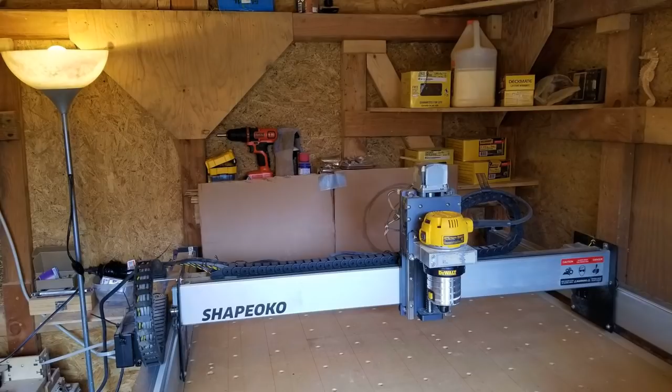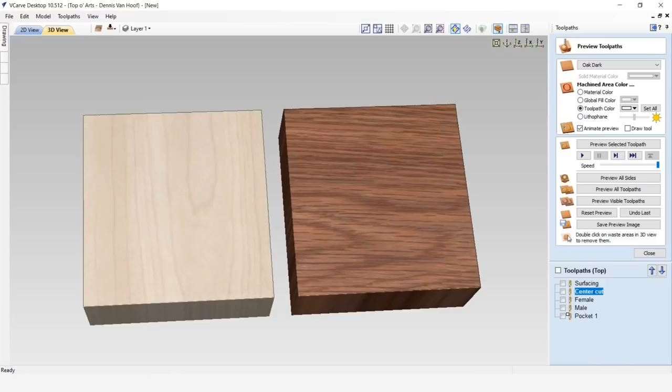The inlay technique has been around for quite a while. It is based on carving a pocket shape, also called female, into a board and then a mirrored protruding shape, also called male, that is usually carved out of wood with a contrasting color. This male piece is glued into the pocket and the excess wood is removed to reveal the shape, a bit like those wooden puzzles for little kids.

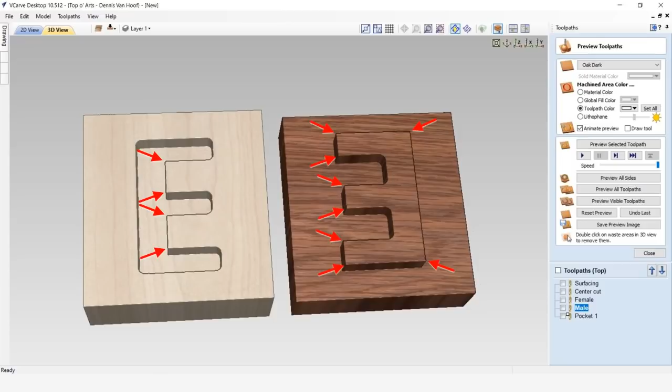But you can immediately see the problem at the corners when using a straight end mill. You can cheat a bit with simple forms by rounding the corners, but that won't work for sharp angles or lines that are thinner than the diameter of the bit, as the bit just can't get to those areas. So some clever techniques have been developed that make use of a V-bit instead of a flat-tipped end mill, which allows the creation of sharp corners for more detailed patterns.

Now, I checked out several of those traditional inlay techniques, but most of them apply a V-bit toolpath to both the female and male components, and that brings some technical problems. And if you do not understand the problem, you cannot appreciate the solution. Right. So let me explain.

One of the problems is that we have to use an aggressive bit plunge to trace the male shape, by tricking VCarve into thinking that the shape to be carved is below the actual stock surface, so that the male shape is sloped, and the longer the slope, the deeper the male can sink into the female VCarve.

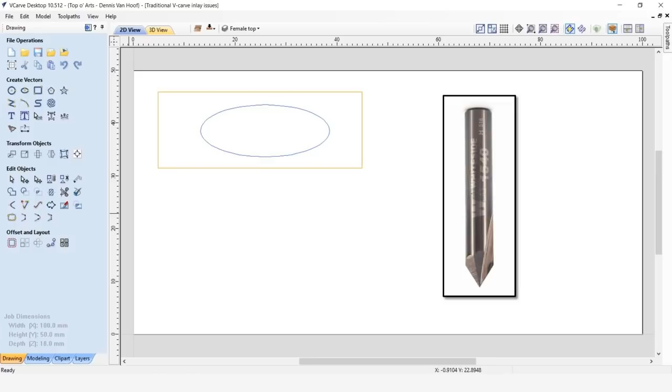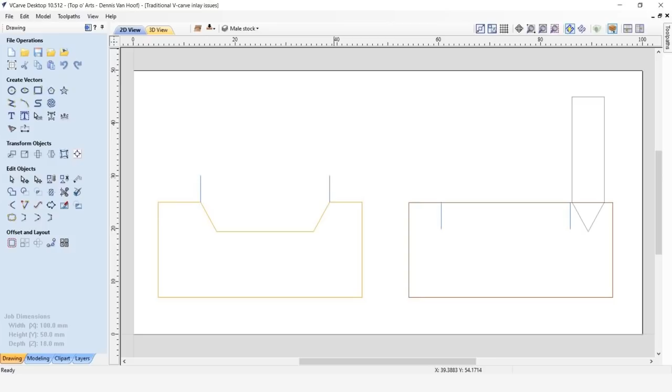Let's say we want to make an inlay in the shape of the blue oval with a 60-degree V-bit. Looking at it from the side, a cross-section of the female stock would look like this, with the blue lines representing the oval's edge. The maximum depth of a 60-degree V-bit would be 5.5 mm, and the V-pocket would look like this. If we then want to carve a mirrored male shape, using the VCarve tool with the same bit and maximum depth, the male would look like this. However, that male would not fit.

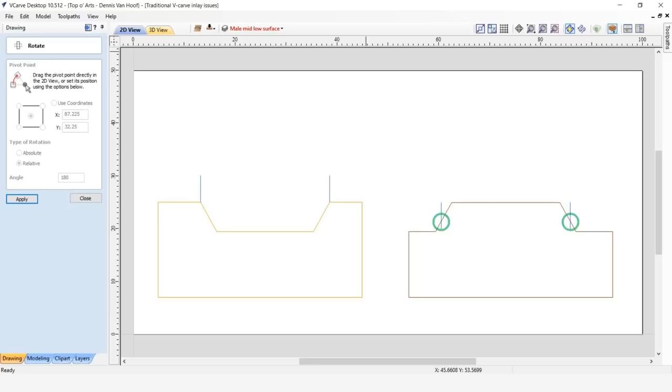What we need is a male that looks like this, and we probably want to add some space between the male and female surface for the glue to flow into, and maybe a bandsaw blade to fit in between, which means that the edge of the oval shape needs to be on the slope at about 1/3 from the bottom. So we need to make the bit perform a V-carve following this shape, and go this deep.

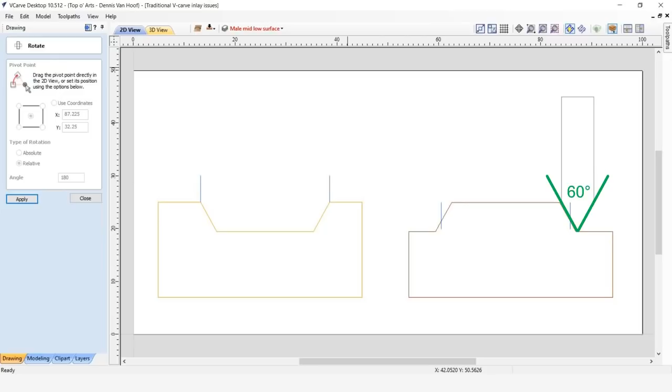And the only way to do that with the software right now is by telling the bit to start carving at this depth and go this deep for a combined depth of 5.5 mm, as that is the maximum angular cutting depth of a 1/4 inch V-bit with a 60-degree tip. And then use a flat end mill to clean up the large surfaces. Okay, problem solved, right? Well, not exactly.

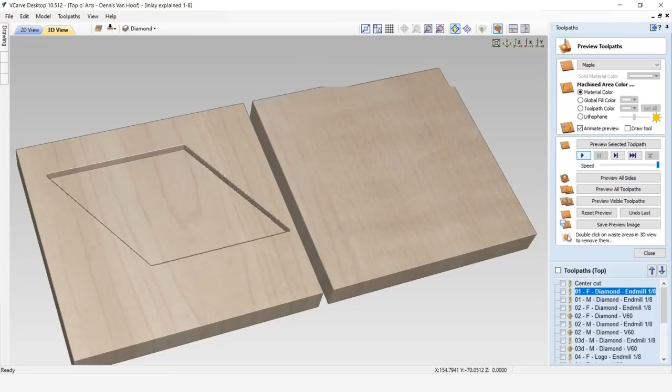Let's recap and have a close look at what we just learned, and then see what happens if we apply these different techniques to a more complicated shape. If we want to make a diamond shape inlay and use a straight end mill to carve both the female and male, the round female corners won't accept the sharp male corners. Using a 60-degree V-bit to trace the profiles won't work either, as the contour of the male plateau will be exactly the same size as the ledge of the female pocket, so the male can't sink in.

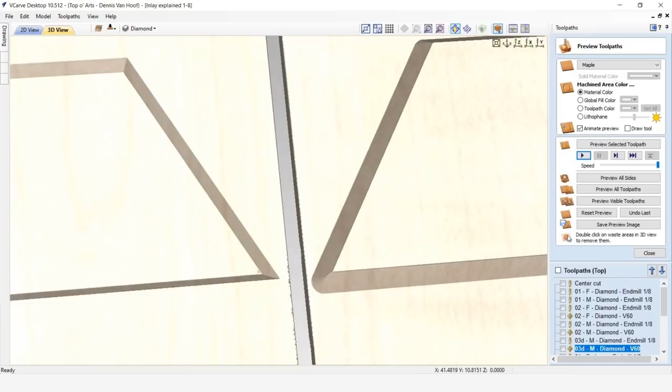Combining the same female V-carve with an extra deep male cut will work for a simple diamond shape like this, as the male can sink in, but only up to the point where the sharp corners transition to a curve. However, when the shape becomes more complicated and has narrow grooves, like my logo, then we run into other problems.

The female can be carved with a 60-degree V-bit as usual, and an end mill to clean up the large surface areas of the pockets, but creating the male with this deep V-carve will result in very shallow contact, and therefore a small gluing surface area due to the thin grooves.

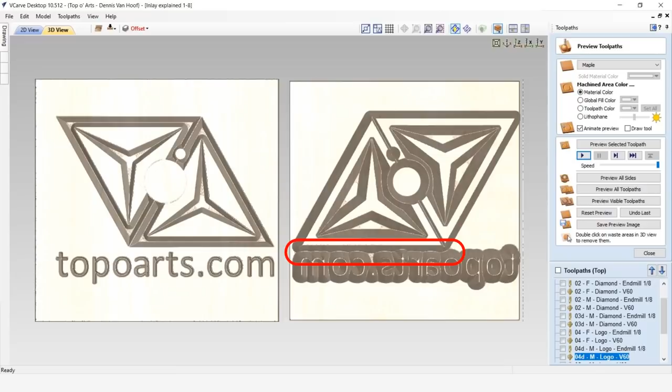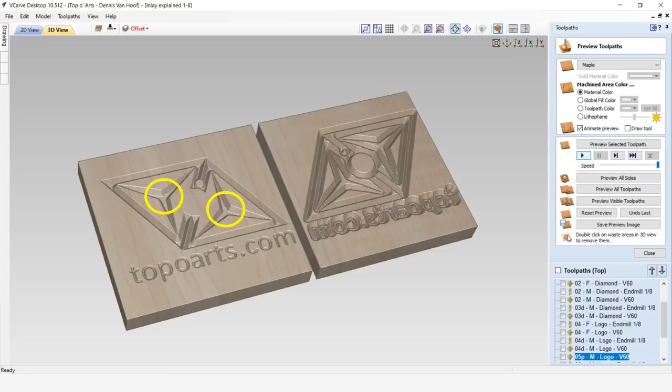Also, some of the individual shapes are so close to each other that the V-bit can't squeeze in between to clear out enough material. The deep male V-carve is basically not an exact inverted copy of the female V-carve. But the prism tool is. This is most obvious from the letters, which are shallow and high up in the female, while short and at the very bottom of the male. Another example is the centers of the triangles that are deep in the female, while tall and reaching all the way to the very top of the male.

So the female and male shapes are now exact inverted copies of each other, but the male still has a lot of material that needs to be removed because the prism tool does not have an integrated cleanup option like the VCarve tool. So I hope Vectric is watching this video, because the cleanup is not so straightforward if you have to design those toolpaths manually.

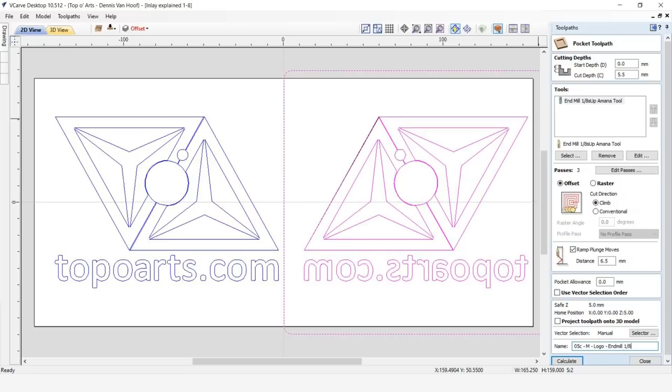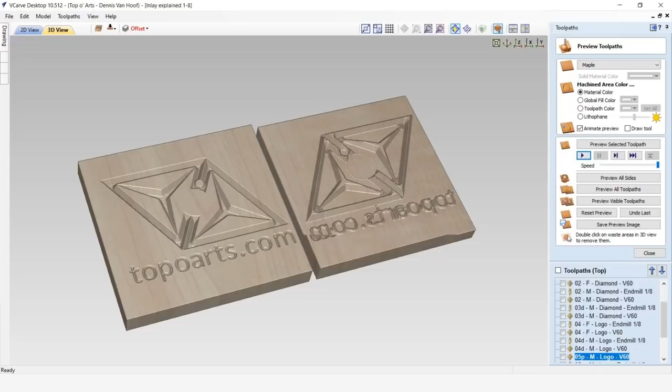We have to add a separate cleanup toolpath for which we can use the standard pocket tool, and we can select multiple diameters of bits to reduce the total carving time. But to keep this example simple, I picked only the smallest end mill that I have, which is a 1/8 bit. So the female V-carve setup remains unchanged, but the male prism carve is now followed by a pocket cleanup. But when you look closely, you can see that the end mill cannot get into those tight corners, so we need to clean up these with the V-bit.

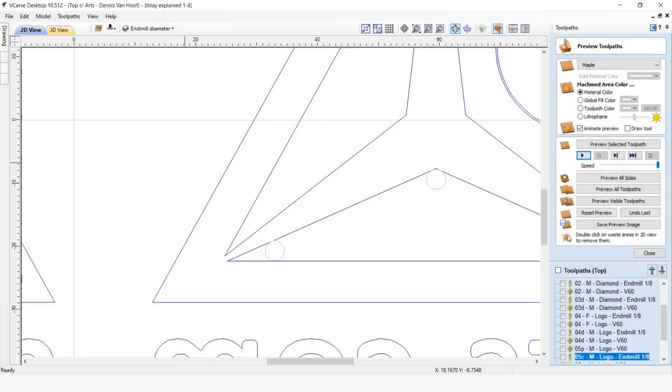When drawing that smallest end mill, which is the 1/8 bit, into the design, you can see that it varies how far the bit can get into the corners, as it depends on the angle of the corner. In the worst case scenario, the bit is kept out of the corner by its radius perpendicular to the closest wall. Or in other words, we'll need to create an offset trench around the shape that is as wide as half the diameter of the smallest cleanup end mill that we're using. And in this example, that's a 1/8 bit, which has a radius of 1.59 millimeters. I'll round this up to 1.6 millimeters for ease of calculation.

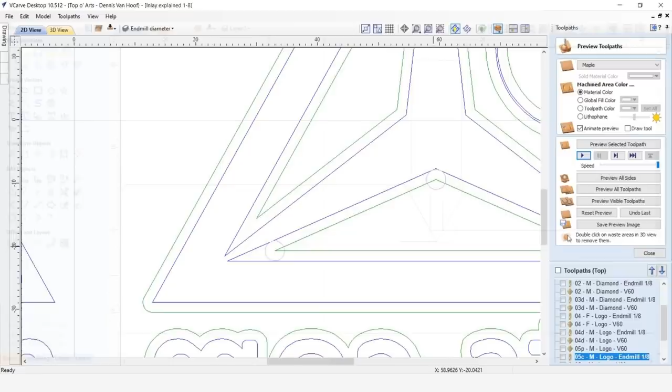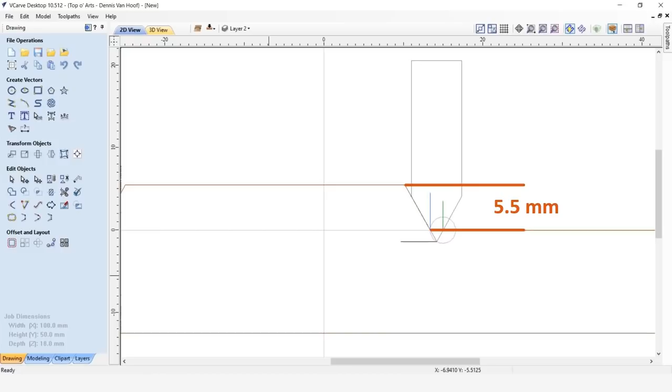When we run a V-carve in this trench, looking at it from the side, you can see that the deepest that the 60-degree V-bit can enter before its slopes touch the trench outline is 1.375 millimeters, which I will round up to 1.4 millimeters. Now we also need to keep in mind that this V-carve cleanup needs to start at the very bottom of the mill, which is 5.5 millimeters at its deepest point. Since most of the material has already been removed, I'm not too worried about such a deep plunge. The CNC and bits should have no problem handling that little bit of wood.

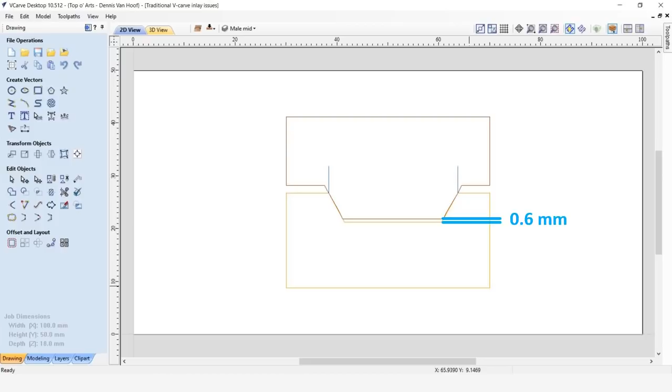Now, if we would fit the male into the female, it would look something like this. And in that case, we might as well deepen the cleanup cut with the end mill by 1.4 millimeters to a total depth of 6.9 millimeters to match the trench depth. This will also create some extra space for any glue that is squeezed out and a bandsaw to fit in between. If we then also shave off another 0.6 millimeters from the top of the male, then we'll have our glue space at the bottom of the female too.

And considering that some male ridges will be very thin and fragile, we might want to do this shaving step at the very beginning of the male carving process, as long as we remember to retain the original Z-start height where the surface used to be for all our following carves.

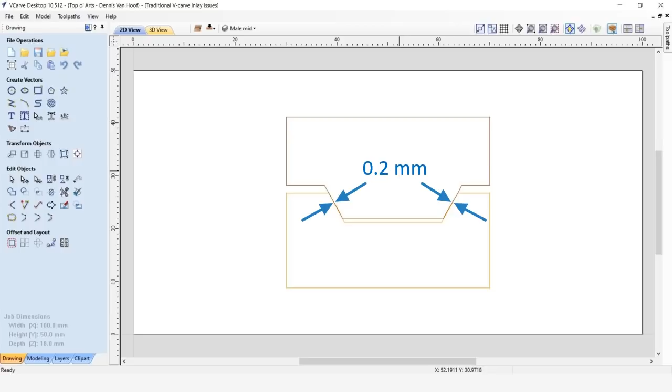My experience is that wood needs about 0.2 millimeters of wiggle room on each side for a tight press fit. So if the male slopes end up at a perpendicular distance of 0.2 millimeters from the female slopes, then the distance between the horizontal surfaces will be 1.8 millimeters, which would be enough for most bandsaws, and 1.0 millimeters for the glue that is squeezed down from the slopes into the female pockets.

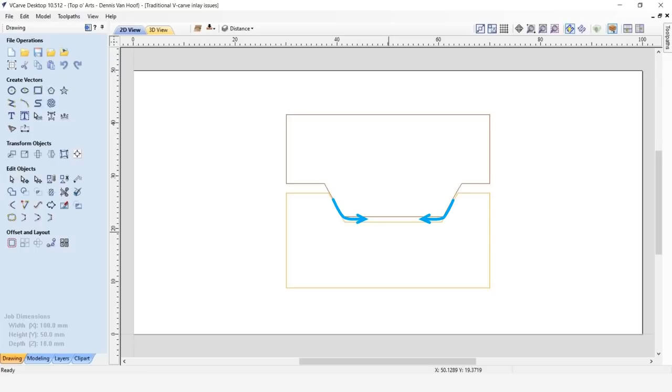When comparing the two techniques side by side, you can see that the traditional deep V-carve approach will work, but that the optimized V-prism carve of the male is almost an exact inverted copy of the female and fits much better. At least that's a theory. We'll find out if it works in practice.

But before I bore you to death with more toolpath talk, let's first have a look at the design and the materials that I chose. About 2 years ago, I made this Geisha figure using a standard V-carve technique, and I thought it would be nice to make a new version out of it, but then with color.

Now I love the texture and grain pattern of natural wood in all its imperfections that give it some extra character. So instead of staining or painting the wood, I plan to use different types of wood with distinct natural colors. I want to create the impression of a traditional Japanese scroll painting for this project.

American holly is one of the whitest hardwoods, and I will use this for the background of the scroll and the fans. Hard maple is slightly darker and has more of a tan color, so I'll use this for the skin. Padauk has a natural deep red color, which will be perfect for the kimono and the mouth, as well as some other fine details.

Olive wood has a very distinct wavy grain pattern of darker and lighter caramel colored lines, which can mimic the reflections of the golden embroidery on the kimono and some other decorative elements. And all these inlays will be traced by a thin line of sparkling carbon steel epoxy resin.

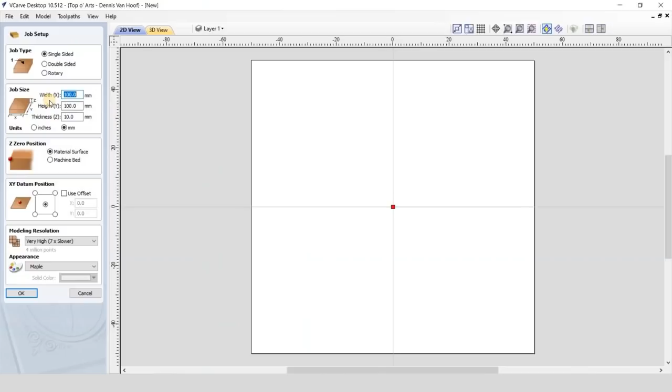Now let me show you how I designed the toolpath using the optimized V-prism technique that I explained. I set the job dimensions to 177 by 625 millimeters with a thickness of 18 millimeters. Instead of creating mirrored copies, it's easier to change it to a double-sided project, and then design all the female carves on the top and male carves on the bottom. But this is only to make the design process easier. The female and male components will be carved from different pieces of wood.

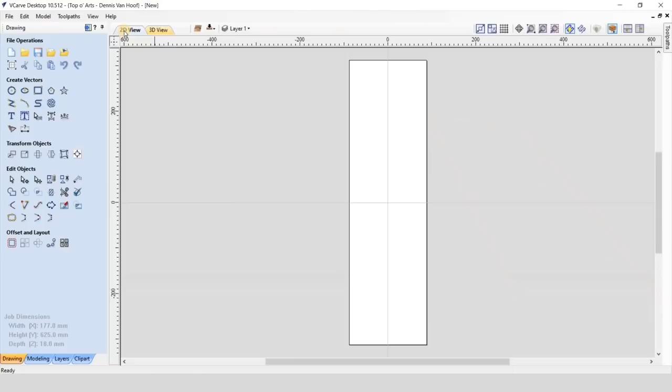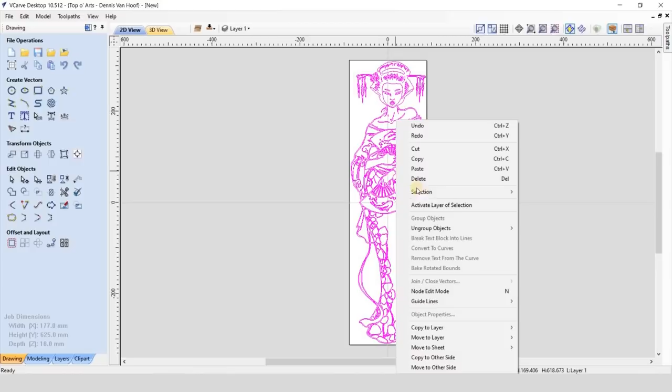I imported the drawing and traced both sides of the black lines with vectors. The actual stock will be larger, so it's okay that the lines are very close to the edge. After manually cleaning up small isolated vectors and closing gaps in the contours, I grouped vectors of areas that would be carved out of hard maple and copied the combined vectors to new layers with names and colors that match the types of wood.

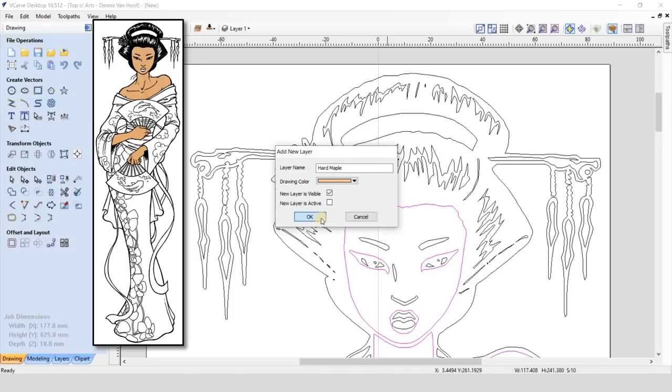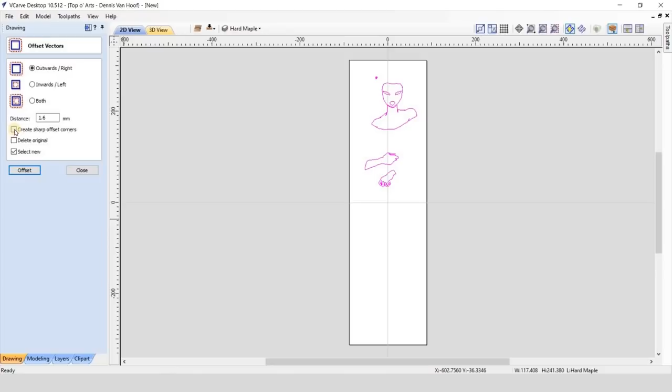I repeated the steps for padauk, olive, and the epoxy lines, to which I added the characters for Geisha. Going back to the hard maple, I created an outwards offset trench of 1.6 mm without sharp corners, as the smallest cleanup end mill would be 1/8 of an inch, which has a radius of 1.5875 mm that I rounded up to 1.6 mm. I grouped the offset trench and moved it to a new layer with a distinct color.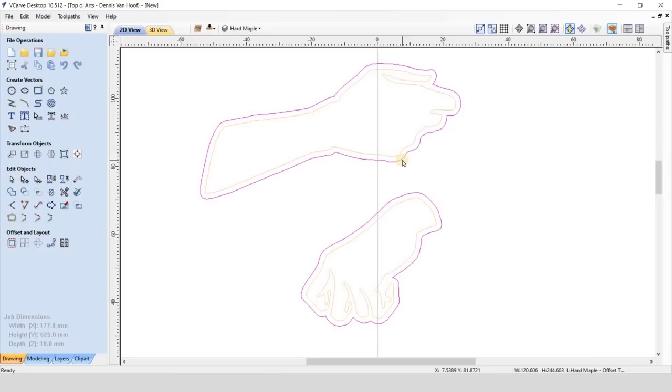I copied both vector groups to the other side to create a mirrored image. I flipped to the bottom side as the male needed one more vector for the shaving and clearance toolpaths, both of which can use the same vector. Since I plan to use a 1-1/8 inch surfacing bit, I created an offset of 30 mm around the hard maple contour, as the diameter of that bit is slightly smaller than that. I moved the vector group to a new layer and gave it a different color.

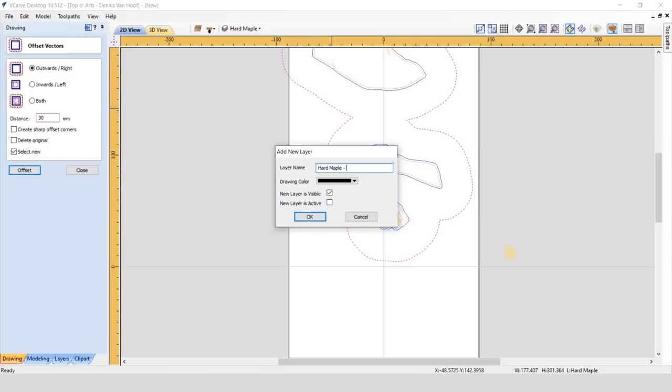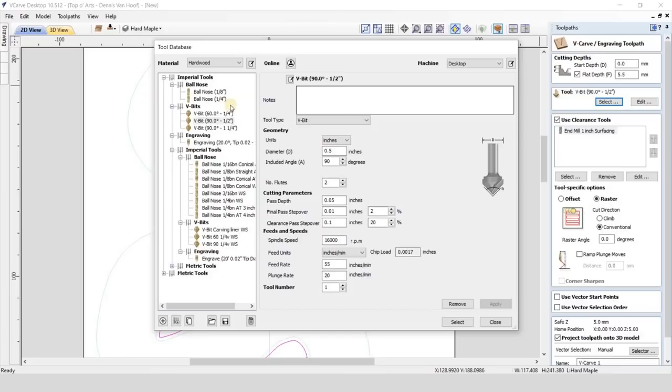I flipped back to the female side and removed the offset trench, as that is not needed for the female V-carve. I switched to the toolpath commands, kept the start depth at 0 and changed the flat depth to 5.5 mm, as I plan to use a 60-degree V-bit combined with 1/8 and 1/4 inch end mills for clearing out the large areas. V-carve automatically selects an offset direction, and I made sure it was set to climb.

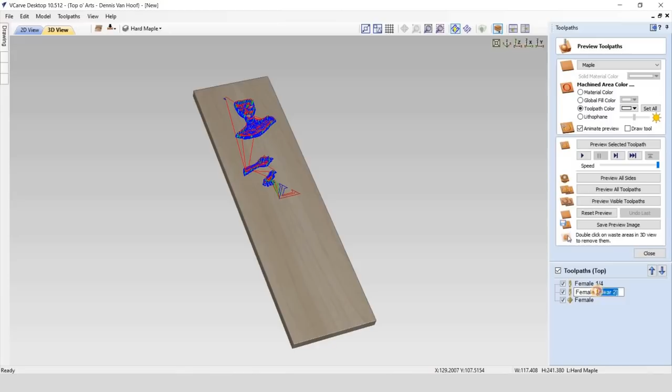I usually apply a ramp plunge that is twice the diameter of the largest end mill. After calculating the toolpaths, I changed the names so I know which tools are required, and checked the simulated carves.

I then flipped to the male on the bottom side and selected the cleanup vector for the 0.6 mm shaving step, for which I chose my largest bit, which is the 1-1/8 surfacing bit. I also included a ramp plunge of about twice its diameter, renamed the toolpath, and checked the simulated carve.

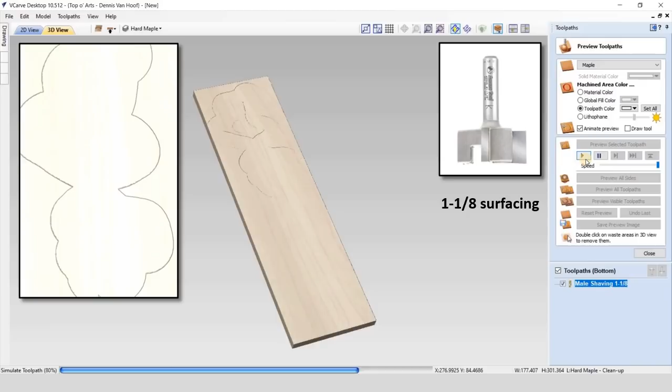I selected the hard maple contours for the prism carve, which should be carved at 5.5 mm, using the same 60-degree V-bit as was used for the female V-carve. I chose a climbing toolpath, named it accordingly, and checked the simulation.

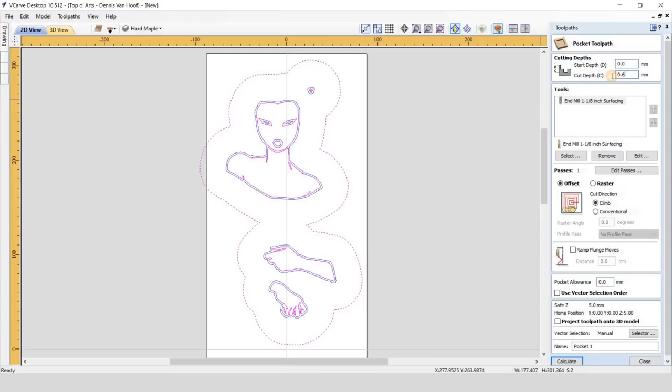After that, I selected the hard maple contours and a cleanup vector to remove the material around the prism carve. I chose the same tools and settings as I did for cleaning up the female V-carve, but set the depth to 6.9 mm.

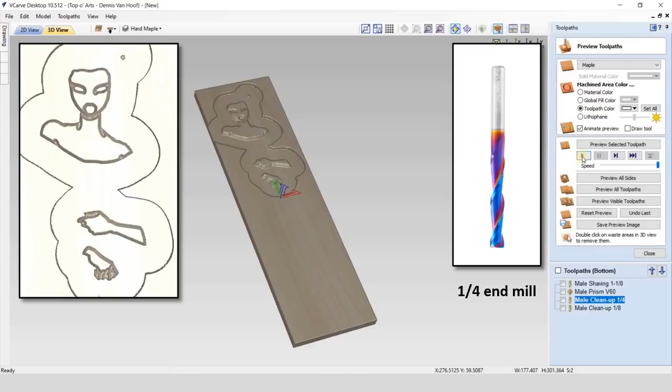Finally, I selected the hard maple contours and the offset trench to remove the material in the areas that cannot be reached by the end mills, with the V-carve starting depth at 5.5 mm and cutting 1.4 mm deep, using the same 60-degree V-bit.

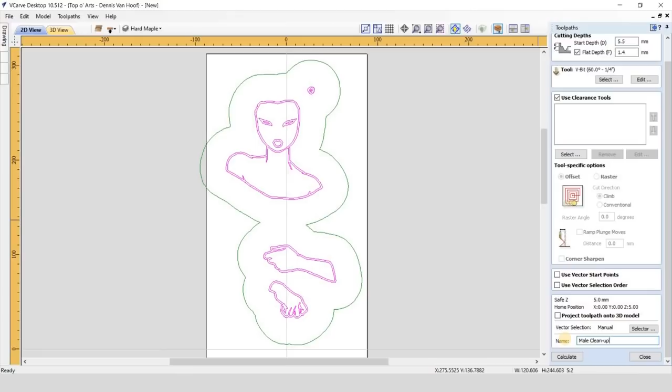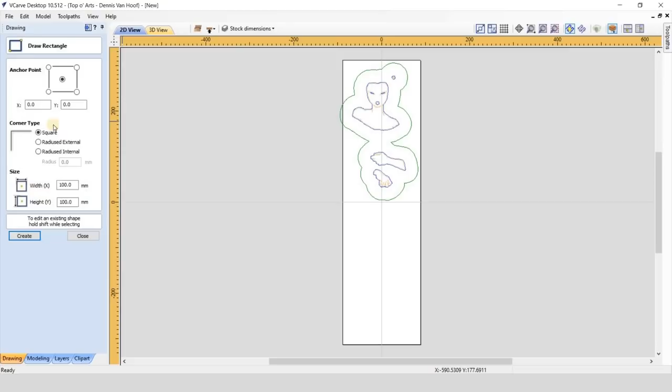I had purchased a piece of 150 by 300 mm hard maple stock. To visualize this, I added a new layer, drew the dimensions and centered it. I then selected all male carves and centered these as well, so I could make sure that everything would fit. It would also make it easier to accurately position the stock onto the CNC bed.

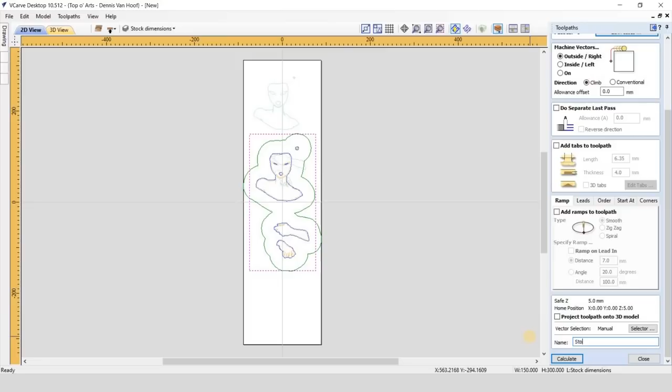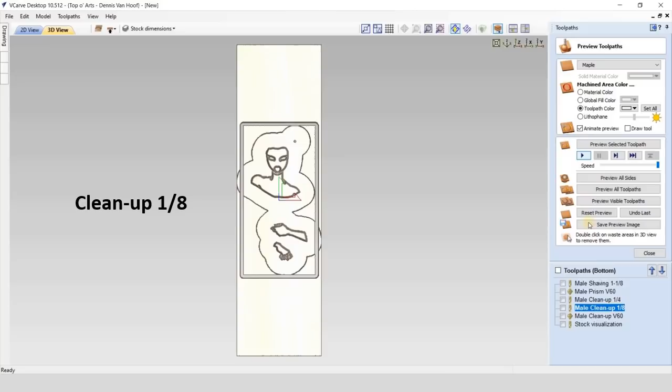I recalculated all male carves and saved them as G-code files. The simulation also shows exactly where I can clamp the stock down and the surfaces that I can use to reset the Z height after swapping bits. For clarity, I added matching colors to the different toolpaths.

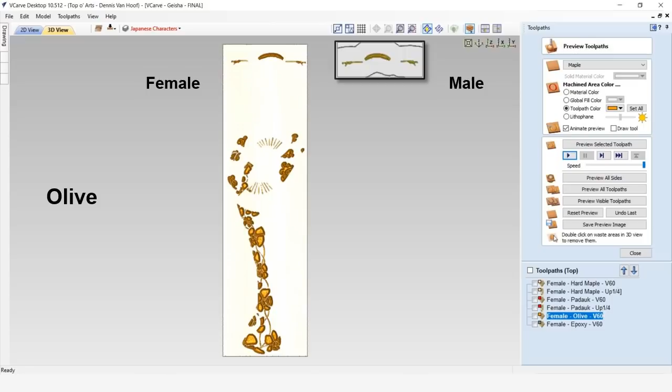I repeated all these steps for the female and male carves of the Padauk. I did the same for the olive female carve, but split the male carves into 3 separate jobs, as the pieces of olive wood were not big enough to fit all carves. Last was the female carve for epoxy, which does not have a male counterpart. Alright, enough talk. Let's get started.

First, I'm going to make this board of American holly half the length and twice as wide. I cut it in half, jointed the sides, and glued the 2 halves together. While the glue is drying, I can start with the first male inlay, hard maple.

Even though the stock is about double the thickness I need, I'm not going to make it any thinner before the CNC process. Because if the optimized V-prism inlay technique doesn't work, or something goes wrong for whatever reason, I can always surface it with a planer and start over again.

The reason why I'm doing the male carves first is that this is a multi-inlay project, and all the individual female carves need to be precisely positioned relative to each other. Also, each new inlay is followed by a surfacing step before the next female V-carve. And I would never be able to achieve that kind of precision if I first had to remove the female stock to carve the male stock and then put the female stock back again for each consecutive inlay.

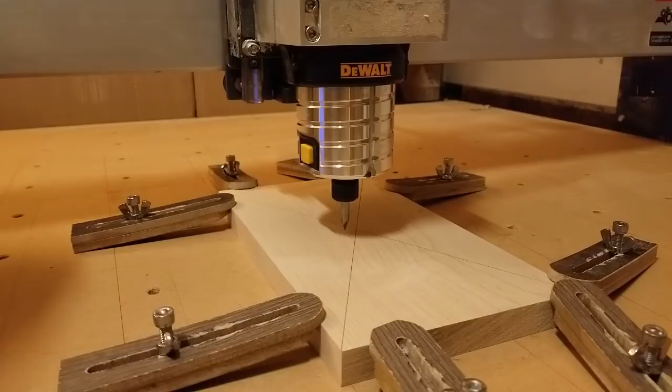I cut the piece of hard maple in half and marked the center. After clamping the stock down, I checked the cutting area in VCarve and repositioned the clamps accordingly. I used a V-bit to set the X and Y 0 coordinates to the approximate center of the stock. I first used a surfacing bit to shave off 0.6 mm.

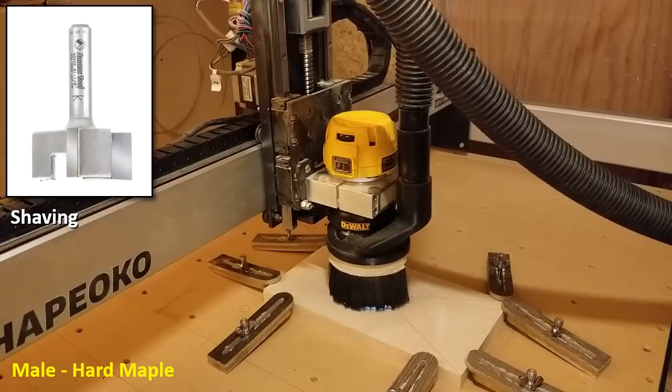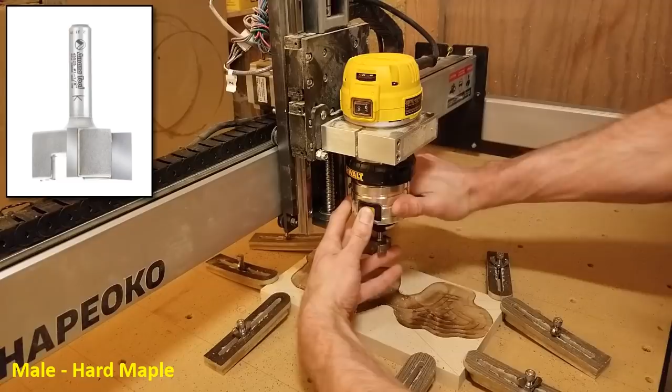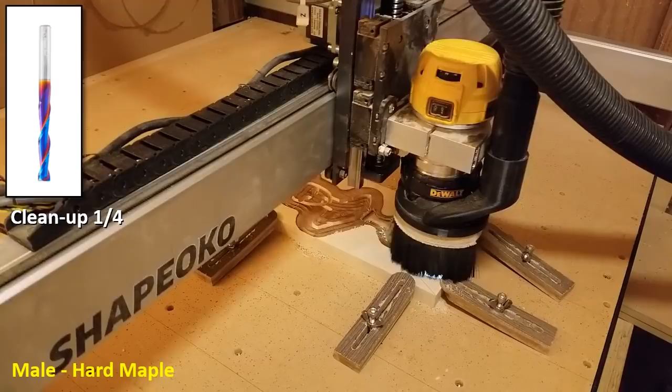Then swapped it for a 60-degree V-bit to do the prism carve. After that, I used a 1/4 inch end mill to clean up the large areas, and then a 1/8 end mill for the areas that didn't fit the 1/4 inch bit. Finally, I used the same V-bit again to carve the offset trench.

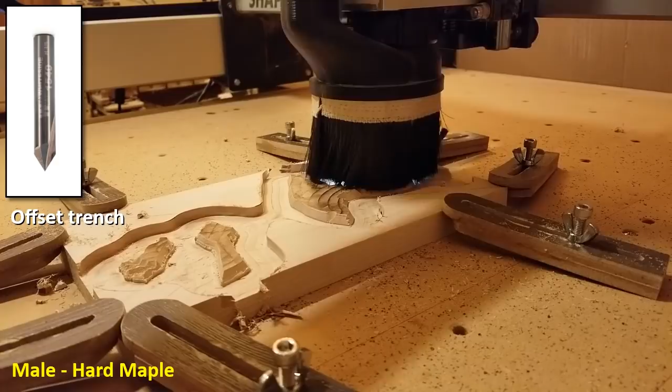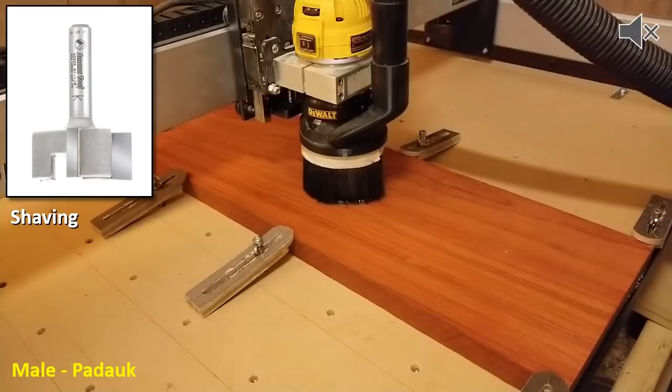I'm quite satisfied with how crisp the edges are. It looks like there's very little manual cleanup to be done. Hard maple is done, Padauk is next. The CNC process was the same as for the hard maple. The Padauk is done too, so now the 3 pieces of olive wood.

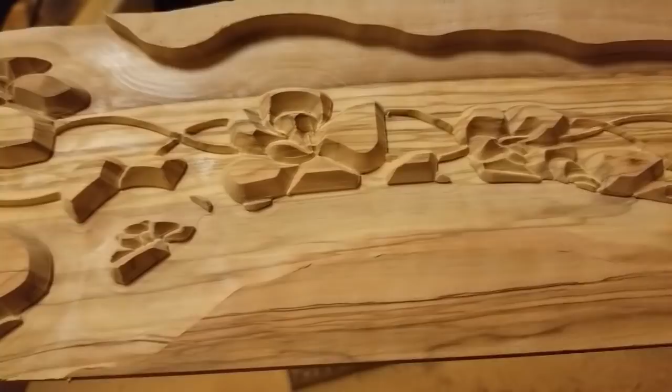The high density of olive wood makes it an excellent material for fine details. All the male carves are completed and the glue of the American holly has dried, so now I can prepare this for the female carves. I scraped off the glue that had squeezed out of the seam and planed both sides to make it as flat as possible and give it a uniform thickness.

Although I don't mind some imperfections in figured wood, this blemish here stands out a little bit too much on such light and smooth looking wood. But if I keep it on the left side, then it should be covered underneath the inlay. The board is practically flat, but I still need to surface it with the CNC to make sure that it's completely level relative to the router.

So just like the male carves, I surfaced the American holly by shaving off a fraction of the top layer, and then proceeded with the female V-carve, followed by the cleanup. Very small inlays like these will be challenging, so instead of gluing the whole panel, I will cut it into smaller pieces with the bandsaw for more precise positioning of the individual male inlays.

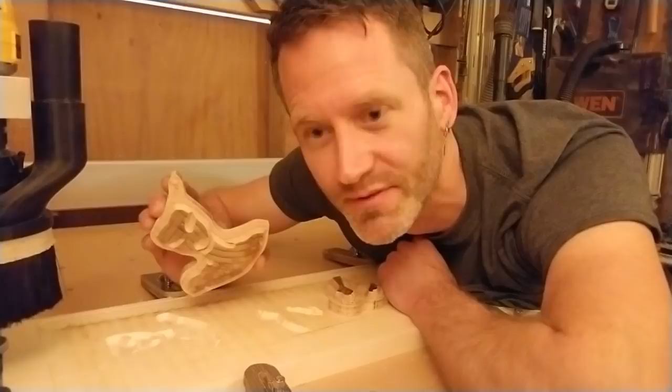The moment of truth. Looks like it fits. Let's get this glued in. I put the glue on the male inlays, pushed them into the female pockets and secured them with the clamps. I'm going to let it dry overnight. The glue has dried, so now I can remove the excess of the male inlay.

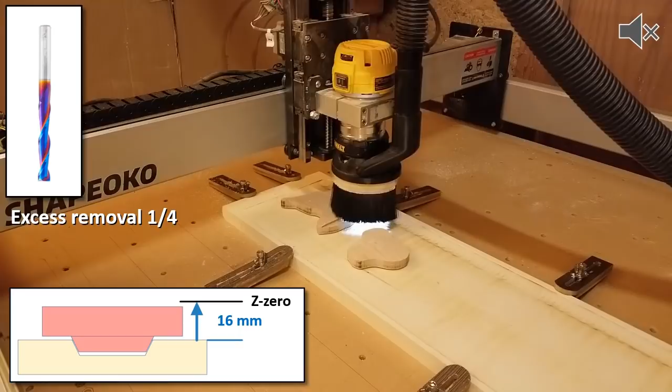The back of the male stuck out almost 15 mm above the American holly surface. I reset the Z0 to 16 mm above the stock surface and then removed 15.5 mm, so there was about half a millimeter of male inlay still sticking out above the American holly surface. This should be low enough to allow the other male inlays to completely sink in.

Some of the male inlays were too thin and fragile and broke off during the CNC process. I'll go ahead and see how it turns out. If the female pockets are filled with just glue, I'll recarve only those areas and then manually fill them with a mixture of sawdust and wood glue.

To reduce the CNC time, I removed several millimeters from the back of the Padauk with the planer and roughly cut out the shapes with the bandsaw. I then carved the female pocket for the Padauk.

Even though I worked as fast as I could, the glue already started to dry in the areas that I had spread out, and I was unable to push the male inlay all the way down into the female pocket. So next time I'll divide large areas like these into smaller pieces that I can glue in separately.

After removing the excess male, I saved some sawdust to fill the gaps later on, and carefully vacuumed the rest, after which it was clear that the left side had not reached full depth, while the right side had. Because the olive wood panels were too small for the planer, I used a jointer to remove the material from the male back sides.

After carving the female pockets for the olive inlays, I decided to put the glue in these pockets instead of on the male inlays. That worked out much better.

I collected sawdust from every single carve so I can make some small repairs. I put a drop of wood glue in the gaps that were missing inlays, sprinkled a generous amount of matching sawdust on top of it, then firmly pressed it in and let it dry overnight. And last is the V-carve for the epoxy.

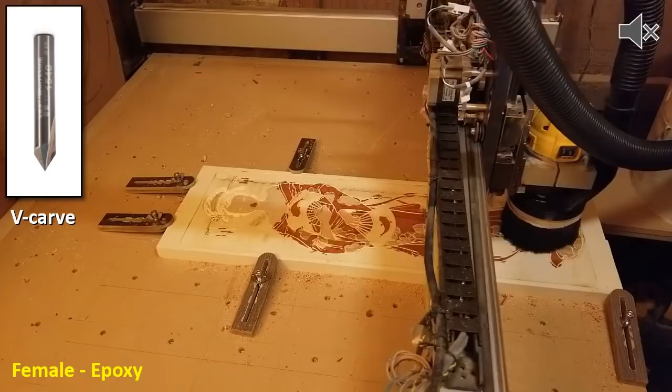I used clear epoxy resin from the Epoxy Resin Store and mixed in the carbon black mica powder. I used a chopstick to drip the epoxy into the V-carve grooves. It will take the epoxy about 3 days to be hard enough for resurfacing.

The epoxy is now hard enough, and I initially planned to do the final surfacing step with the CNC, but I'm afraid that the bit will leave burn marks on the white American holly. Sanding is definitely not an option, because the red dust from the Padauk will for sure leave stains all over the place. So I'm going to use the planer. I checked the difference in height, and it looks like the CNC bed is level enough and not tilted or warped, so I'm just going to hope for the best.

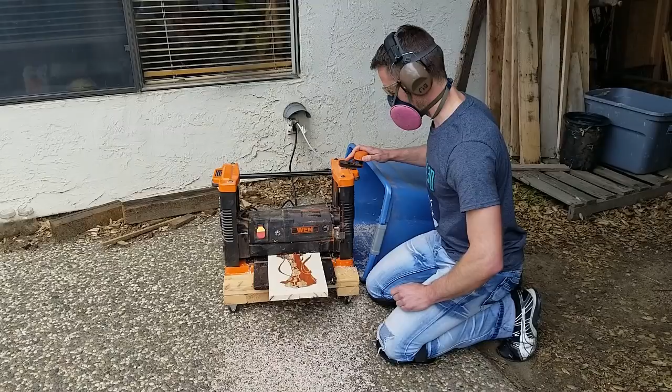After several light passes, the top and bottom side were in pretty good shape, but I noticed that the midsection still needed a little bit more shaving. Apparently the CNC bed was not flat enough. If I would simply continue to lower the planer, the knives would take off too much from the top and bottom, so I lowered the planer only in the center and then quickly moved it up again in a fluent motion as the board was pulled through.

To create the impression of a scroll, I will add 3D rolls to the top and bottom. And although inlays are technically speaking 3D cuts, those rolls are the only two parts that will truly look 3D. I'll make them out of 2 boards of American holly and a piece of olive wood. I jointed one side of each board, ripped them with the table saw, and then glued the halves for a combined thickness of just over 50 mm. I let the glue dry overnight.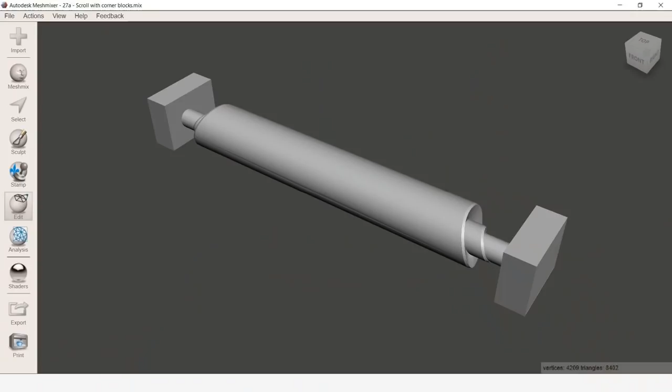In the meantime, I designed the scrolls in Meshmixer and a toolpath as a double-sided job in VCarve. I added 2 stubs to the bottom for alignment when flipping the stock, similar to the vertical tabs that I explained in my video where I carve a frog on a leaf. I then used the Moulding tool in VCarve to design both sides of the end caps that would slide over the poles of the scroll rolls.

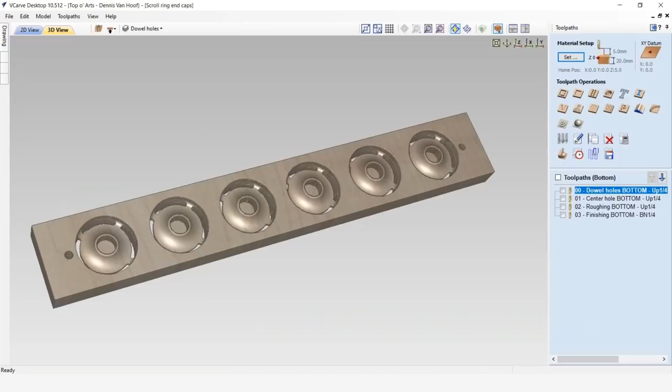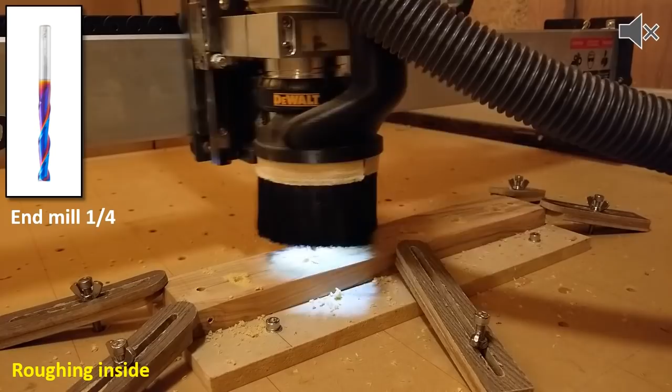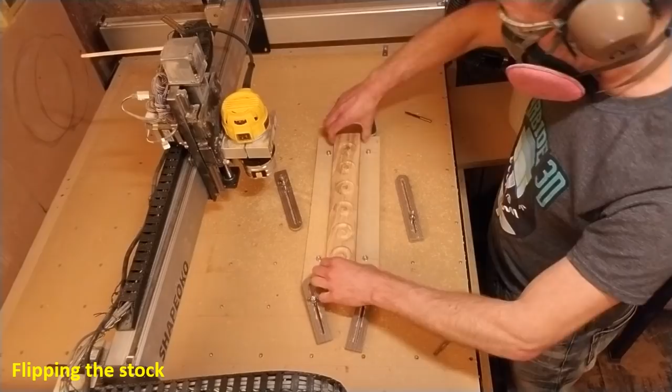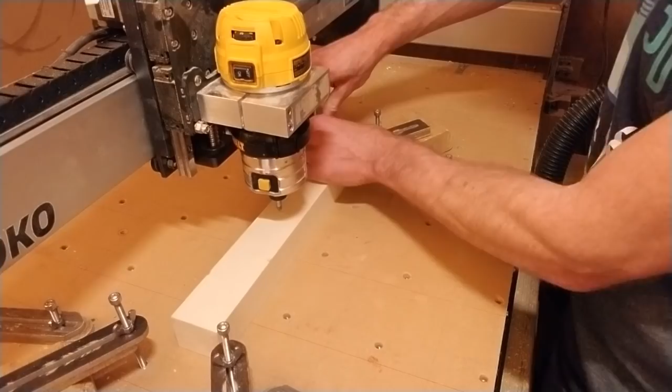Since I added dowel holes to the double-sided design, I secured a piece of spoil board on the CNC bed and mounted the olive wood stock on top. I cut the tabs with the bandsaw, removed the stubs with the Dremel, and then finished it off with the file and sanding paper. After the glue of the scroll stock had dried, I clamped it onto the CNC bed as straight as possible to first carve the bottom side.

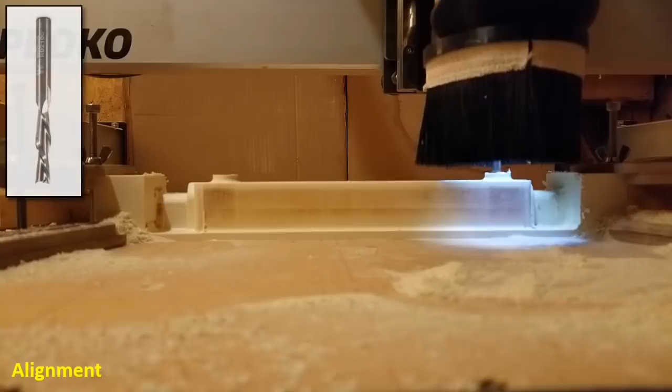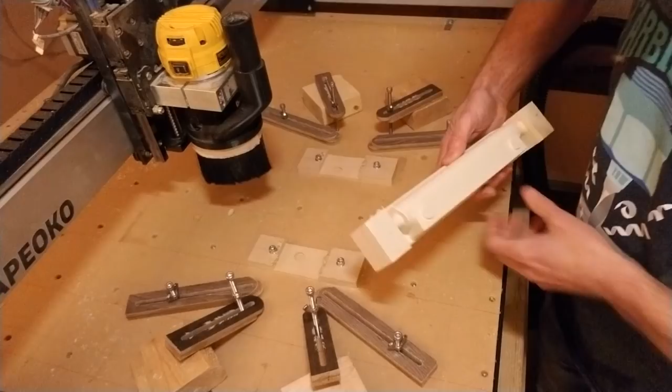I had added these alignment stubs to the design for precise positioning when flipping the stock. I then secured 2 pieces of spoil board onto the CNC bed, lowered their centers to a 4 mm thickness, and carved the alignment holes that fit the stubs that I had carved on the bottom side of the scroll.

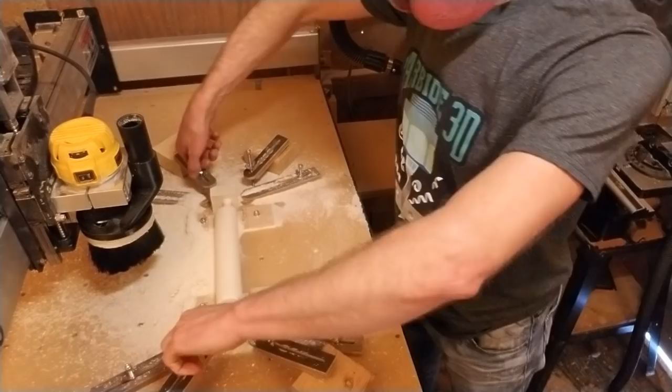I cut the alignment stubs with a flush cut pull saw and the tabs with the regular fine tooth saw, and then finished the surface with sanding paper. I added a few drops of glue onto the scroll ends and slid the olive wood end caps on. While the glue was drying, I cut the top and bottom ends of the completed inlay with a 20-degree angle. I stuck painter's tape to the backside of the inlay, put a layer of wood glue on the surfaces, and wrapped the tape around the scroll to hold it in place.

After the glue had dried, I covered the wood with a single layer of clear varnish to preserve the natural colors of the different kinds of wood. Now that the varnish is dry, let me point out a few things that didn't quite go as planned and what I will do differently next time for better results. First of all, I will avoid very thin male inlays, as the wood will be very fragile and is likely to splinter and break off. This means I will have to make some manual modifications to the design in VCarve.

Especially the Padauk was not really cooperating, so next time I'm working with large inlays, I will subdivide these into smaller separate inlays for easier handling and less warping of the wood. I will also use slow curing glue instead of regular wood glue to give the male inlay more time to completely settle into the female pocket before the glue gets too hard. You may have noticed that for hard maple and Padauk, I put the glue on a male inlay, but for olive wood, I put the glue in a female pocket.